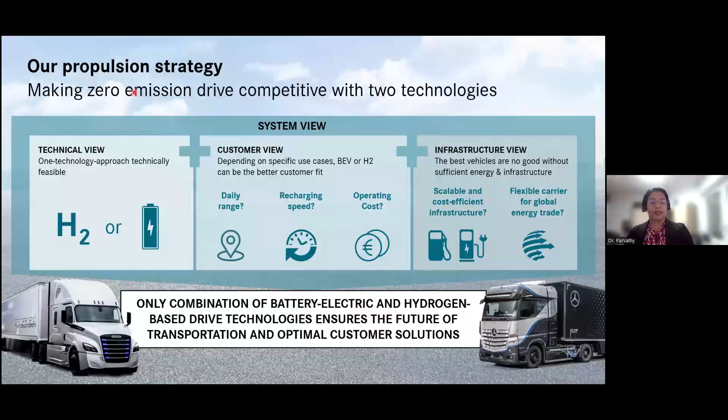A few of the major truck portfolios I'd love to introduce: first is the Gen 2 hydrogen truck, and eActros 600 is our popular model in Europe, with eActros for the smaller version and Canter for smaller payload vehicles. The hydrogen trucks can carry more load over more distance, let's say 1,000 kilometers in one hydrogen refill session.

The battery trucks go for lighter loads, a maximum of around 40 tons, 37 tons, for shorter distance, let's say 500 to 600 kilometers. You can ask questions in between during the slides - please interrupt me if I'm too fast or if you have any doubts or queries.

Our main ambition is, of course, to have carbon neutral transportation by 2039, as per the rules and regulations put forward by countries all over the world.

We have a portfolio from school buses, Thomas Built buses, to Freightliners - these are the European models and buses. The eCitaro is a popular model in Europe and specifically in Germany, and Econic is for waste trucks. Freightliner covers shorter trucks, for example Amazon pickup trucks or DHL postal services. We also offer chargers for developments in Turkey and many European countries, and Fuso is the popular model in Japan.

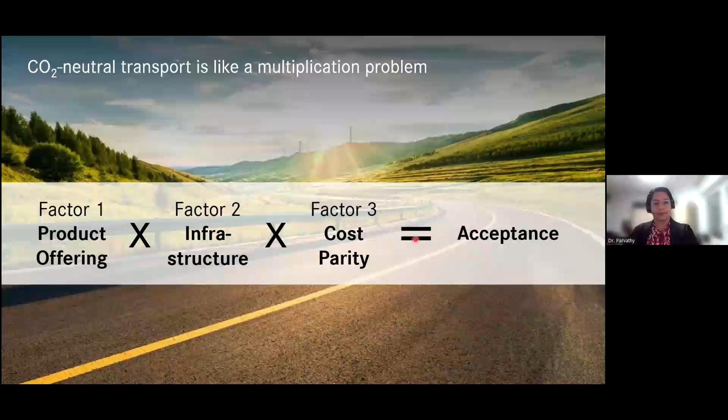So we have strong brands across the world, also in India in terms of school buses and short-term payload trucks. Our software development center is located in Bangalore, near Whitefield, and we have close collaboration with IISc Bangalore and also IIT Hyderabad.

Having given a brief outline about the truck industry, I'd like to give a summary outline of my talk today. First, I will brush up on the basics of lithium-ion batteries, then the safety aspects, how thermal propagation occurs, and also the safety and performance aspect, coming to the final discussion points, which is the second life of batteries and how the applications of AI in transportation are possible.

Batteries are quite important to us. Just think about how many lithium-ion batteries are within 5 feet of you. We are in the online presence, but our laptops, headsets, mobile phones, iPads, everything needs a battery. That means batteries are inevitable for our daily life.

The battery journey started with a prominent innovation from Sony in 1991, in terms of the intercalation battery named lithium cobalt oxide.

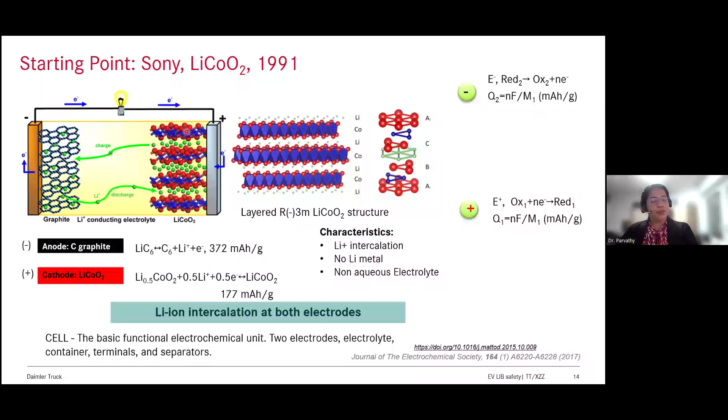This part of it was awarded the Nobel Prize in 2019, for three excellent scientists, Professor Goodenough, and also Akira Yoshino. It's a sandwich structure battery in general. I hope it's clear for all of the audience.

When you have this kind of three-layer structure, it could be arranged in three types of design, called various cell design formats. Depending upon the application, we try to use a specific cell, depending upon the voltage requirement, current requirement, and also the safety. So these are the three important factors.

As you could see, this is a cross-section 3D diagram for an electric truck. Usually the batteries are kept on the ground compartment closer to the axles, with a central line connecting all six wheel drives. It's a 6x2 axle drive, with a powertrain controlling it.

This battery pack, when magnified, looks like various compartments, each made of what we call cells. So cell, module, and pack - these are the three levels of battery.

Let me walk you through the cell formats available. The cylindrical cell - these are the typical cells that we see in our clocks or electronic toys. It's easier to manufacture and quite strong; even if you put it down, it's quite resistant to rupture. But it is heavy because of the metal case, and it's not very nice for multicellular packs.

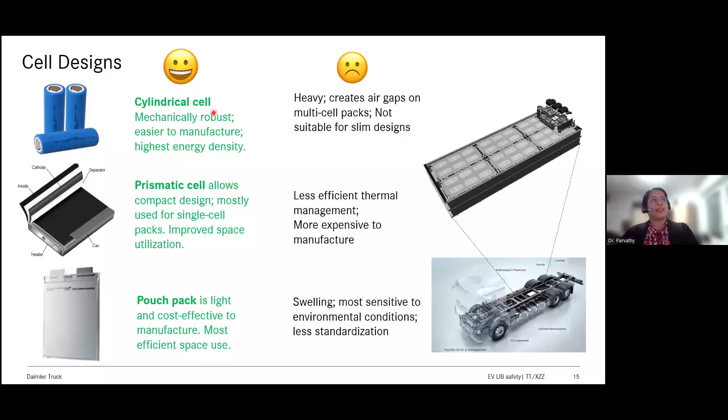So let's visit some of the main battery properties. The first one I would love to explain is that battery properties and the application scenario are defined by various factors. Of course, battery suitability has to be decided based on the type of material chemistry - lithium nickel manganese or cobalt oxide, lithium iron phosphate, or solid state batteries.

So the main battery property that we have to consider is, of course, cost should be less - that is all of our dream. Sustainability - it should have less carbon footprint, and it should be safer because it shouldn't explode, and it should deliver enough power and energy density, and it should last for a longer lifetime.

So all of the batteries, they are like humans. They don't like much higher temperature or higher discharge rates or voltage. So batteries are quite sensitive to the environment in terms of temperature and voltage.

When you talk about batteries, instead of different formats, there are different types of batteries as well for applications. For example, if we have a glucose sensor that needs to be applied to our body, then we need some kind of flexible battery. Here we use lithium polymer battery for that application.

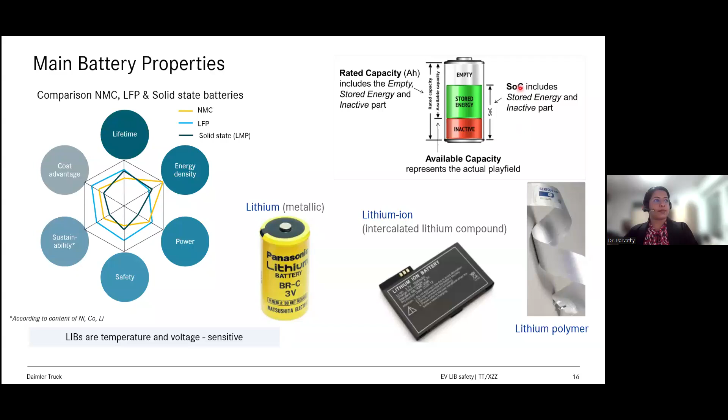As I explained before, there are different battery chemistries, namely NMC, LFP, and lithium polymer batteries, also known as solid state batteries. In these two, we have a liquid type of electrolyte. This is not based on water, but non-aqueous based.

In solid state batteries, the electrolyte will be lithium conductive polymers. That means it's quite solid, but this will provide more safety because it will not flow out during operation or in any safety risk condition. So solid electrolytes are more safe - that means we don't require any more separators, films, or membranes like that.

They provide higher energy density because the anode is usually metallic lithium. The only demerit of solid state batteries is that they require temperature stabilization every time. In order for this solid state electrolyte to activate, we need a temperature between 80 to 100 degrees Celsius, so the battery should always be hot.

There are different companies which produce it for electric buses in Germany - lithium polymer or LMP. These are from France; we import it from France, one of the startup companies, and we utilize it in our electric buses, especially e-Citaros and the freight buses for airports.

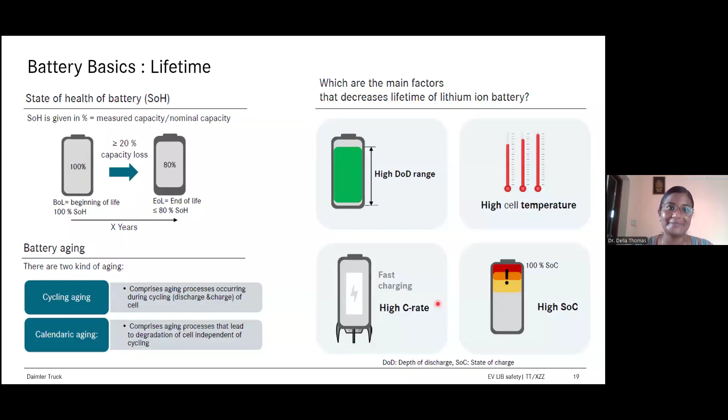I hope this slide is clear for the audience. If there are any questions, please revert back to me. I think they may ask questions towards the end, okay Parvathy? All right, yeah, then sure, towards the end you can give 15 or 20 minutes. Yes, sure, we'll do it like that.

Okay, so we have revisited the battery aspects until now, and not all batteries are the same because we need batteries specific for each of the applications.

For trucks, the main requirement is based on the consumer, because most consumers require more transportation capacity, more payload, and also more range. Typically, truck drivers in Europe, per the rules, are required to take a break after 4.5 hours of continuous driving. That is why we are aiming for more or less 500 kilometers range.

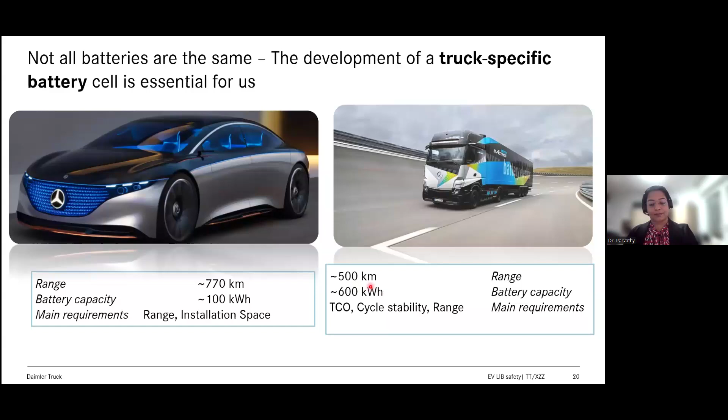When you compare the metrics and numbers for cars and heavy duty vehicles, the car mass is very small, but trucks can go up to many tons. The range we are looking at is 1.2 million kilometers. However, for cars there are different warranty conditions, like 300,000 to 400,000 kilometers maximum for 4 years, because it depends on the individual driver. So we can design the warranty condition as per the customer as well.

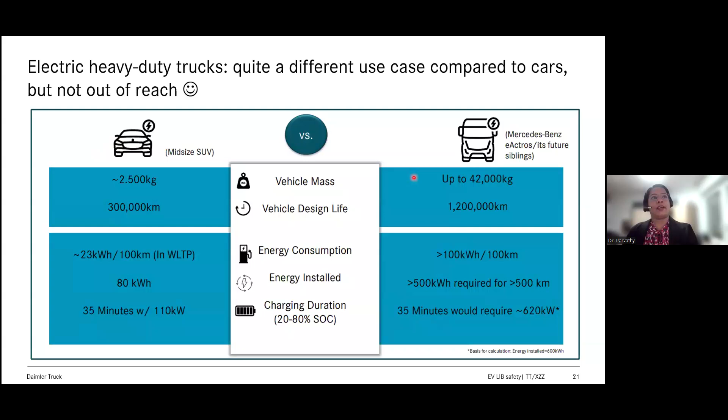The charging duration is very different for cars. Our cars should be charged fast, in the time it takes to get a coffee or so. But for trucks, the payload time requirement is even stricter, because trucks need to cover more distance, so less time should be spent charging. It's a win-win condition, but these are two different aspects of automobiles, heavy duty and medium size.

Of course, when we consider trucks, they are quite big, so the truck batteries are also big, as you can imagine compared to car batteries. The amount of kilometers driven by vehicles ranges from long haul trucks to medium-sized trucks and buses, which are mostly driven within and between cities, like intercity buses and delivery trucks such as DHL and Amazon, which cover shorter distances, and cars even less.

So there are many competitors for us: MAN, Scania, Volvo, DAF. These are mainly the players in the European market, and of course in India the market is different. Anyway, we need to reduce the carbon footprint, and we will provide it because trucks drive more kilometers per year than cars, and this will be more effective.

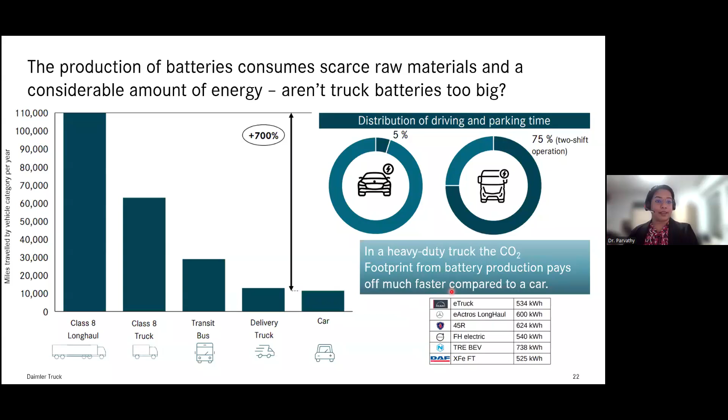So we have revisited earlier the different chemistries for batteries and different formats. Let's have a comparison. All of this is based on the cost the customer can afford, and also how much the C rates and faster charging rates should be. Higher C rates mean we go for NMC-based cathode materials, and for safety we go for LFP. Most Chinese manufacturers are mostly concentrated in LFP-based chemistry, and in Europe it's a mixture of both, mostly.

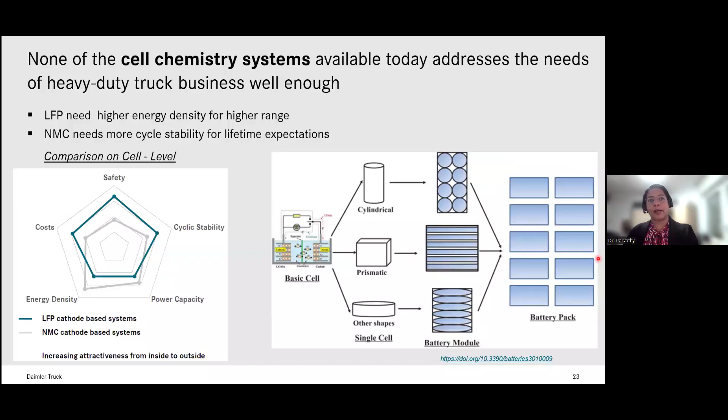As you could see, the cells are the backbone, and we convert and stack them into the battery module, and then stack that completely into a battery pack and enclose it in a plastic case.

So we have learned about the good things about batteries until now. Of course, there are quite a bit of safety concerns with lithium-ion batteries as well. As you can see, some cylindrical battery cells can actually spill electrolyte, which is corrosive, so it's harmful for us, being acidic in nature. Also, some lithium metals could grow and short circuit, causing explosions. This is one explosion which happened in 2021 in southern Germany, because a diesel truck caught fire and 15 of our buses got into an explosion.

This one recently happened in France, and this is swelling of a pouch format cell, which happened in South Korea recently. All of these accidents have an impact on the safety concerns for lithium-ion batteries, which means we need to provide them protection.

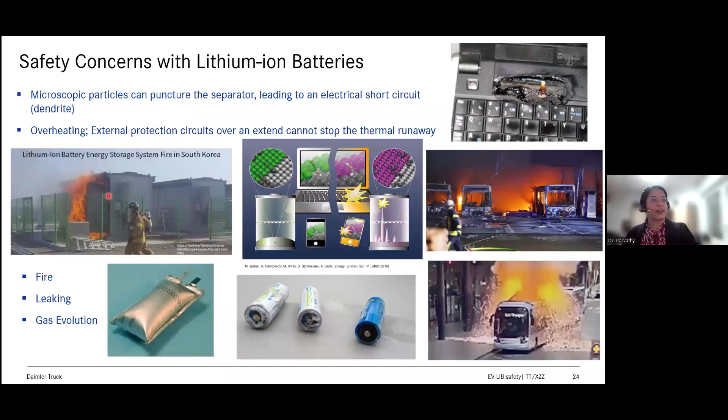In the previous slide, we talked about the accidents that could be caused. So what are the reasons for those accidents to occur? The main causes are electrical, when we overcharge or over discharge; thermal, if temperature fluctuations are too high during use; or mechanical abuse.

If somebody tries to penetrate the battery or sometimes drop the battery, internally, unfortunately, this could not be avoided, some short circuit mechanisms. Of course, there are many testing activities which could replicate this kind of phenomena, and this is what all the automobile manufacturers use.

So they try to do all the mechanical, electric, and thermal abuse tests, and thereby studying the safety aspects of battery. Always operate the battery in a safe, normal area that is specified by the manufacturers. And over the voltage range, single cells means 2.5 to 4.2, depending upon the temperature range that you are supposed to operate.

Once it reaches the damage area, the composition of the material changes and structural changes happen, and there will be an exothermic chemical reaction. This detail we will deal with in the next slide.

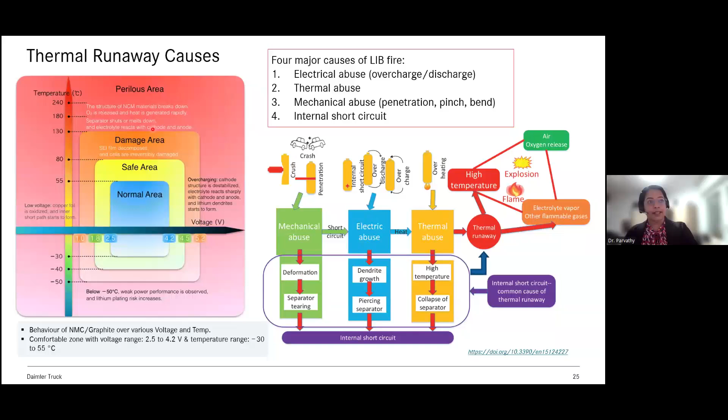So when there is a temperature fluctuation, it is like a cyclic chemical reaction. Suppose this one cell is having voltage, current, or thermal fluctuation, thereby it will cause an effective temperature rise and the chemical composition will change at the atomic level, and there will be an exothermic reaction, meaning heat is generated. The heat will be dissipated at some point, but then again heat is generated. And there will be some software warnings for it, an early warning.

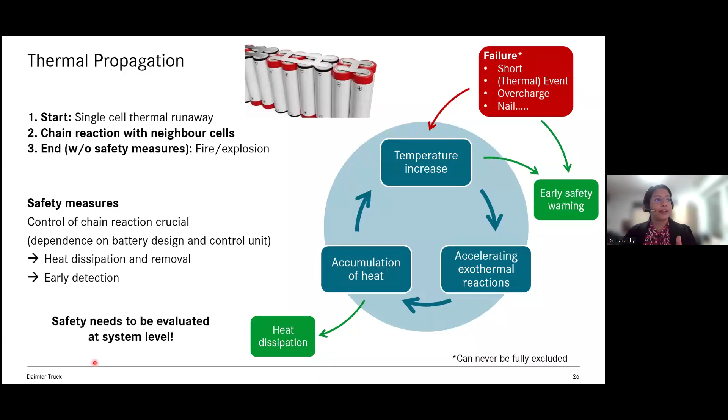If there is only one cell, we could somehow contain it by turning off or using the safety mechanism. But if multiple cells are affected, unfortunately it's like a chain reaction, and this will continue no matter what safety mechanism is in place. So we need different levels of safety mechanisms in the cell, module, pack, and system level. System level means vehicle level.

We have seen the various cell formats previously, such as cylindrical, pouch cell, and prismatic cells. There are various tabs on top of these, and also heat dissipation mechanisms and current interruption devices for the various cell formats.

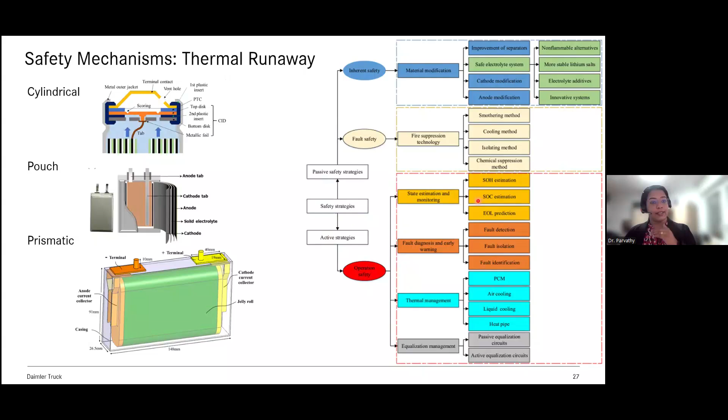There are many safety strategies, active and passive. Passively means we can use a resisting component to dissipate the heat. Sometimes manufacturers use a brake resistor to dissipate some of the energy. Active strategies mean we always use thermal management software, battery diagnostic software, and monitoring software. This gives more efficient warning and early state estimation to the user, whoever is driving the vehicle.

All of these concerns should be addressed, and we need more research and development activities, especially regarding aging and degradation mechanisms. We also need new battery materials and innovative methods, and we require understanding of how batteries behave thermally during the chemical reaction. So lithium battery safety could be engineered through better, more efficient materials, better battery materials, and better software. And the brain of the battery is the battery management system, which we will revisit in upcoming slides. In general, these are the battery safety risk hazards.

When you say batteries are important for each and every application, there are many test and development activities behind it. We need to identify which is the better battery for our application. I am coming from an automobile field, so that means individual cells need to be evaluated for electrical suitability, temperature stability, and abuse tests, also known as negative tests. These are operating above the normal window to find the safety aspect.

All the individual battery cells will be stacked together to form a module, and modules are stacked together to form battery packs. There is an individual battery management system, in short BMS, which controls the range, the operating window, and also the early warning signs for the user. For trucks or electric vehicles, we require multiple battery packs stacked together because the energy requirement is quite higher.

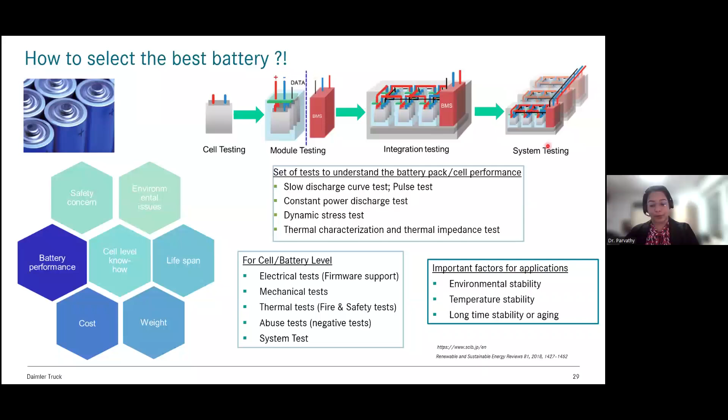Safety could begin from the material level, which is the chemical level, evaluating the flammability and toxicity of the chemicals, and determining the best anode and cathode materials. At the cell level, we could see this example of a cylindrical cell, with some kind of tabs on top to provide cell-level safety.

But module and pack level means all of these cells are stacked together, so if one of them goes into thermal runaway, there are chances that the fire can spread to another compartment. This should be avoided, and this is the most critical aspect for the entire automobile industry. For electrification, we need safety design.

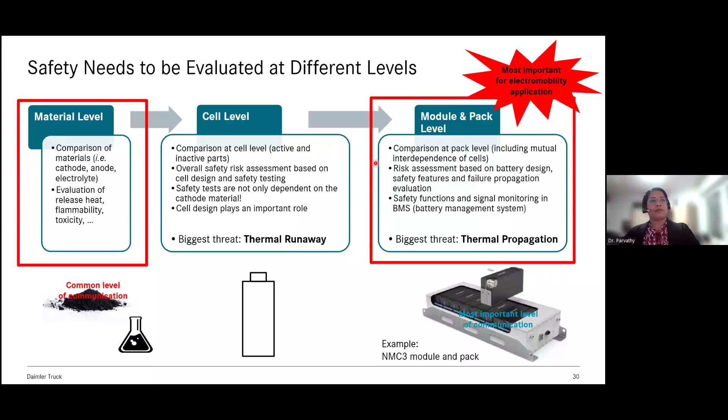So as a first part wrap up, I would love to give you a conclusion. We have studied the basics of the battery. We have revisited what are the safety hazards and how we could select the best battery material depending upon our application, and also how to improve the safety of the batteries.

These are the chemical phenomena which happen when the battery is subjected to high temperature, and there is heat accumulation and then explosion. These are the chemical reactions at the different stages when they undergo thermal runaway. And we have revisited the terms of the battery, namely different battery definitions.

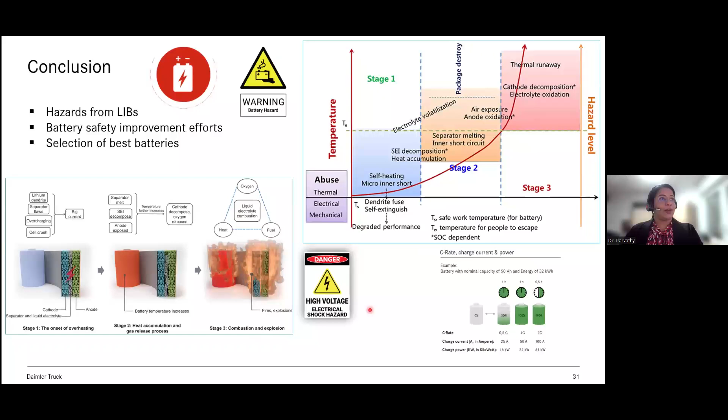All right, so next let's go back to the environmental impact of the battery. We have different types of battery manufacturing techniques, such as based on chemicals, water-based, and without the need of any solvents. There's also the dry coating method. Tesla batteries mainly are made using dry coating methods, and we need all of these steps.

We need expert input and also quality control, because the materials have to be shipped from all over the world. As you know, battery materials are shipped mainly from China, from Australia for lithium, from Chile. So we need logistics control, and best quality control shall be processed.

We also need the data for our critical parameters, because the battery has to be operated at certain safety conditions, and all of this requires data. This is where we require artificial intelligence and machine learning algorithms. So even in logistics, warehouse, and production, we have to use all the data analytics.

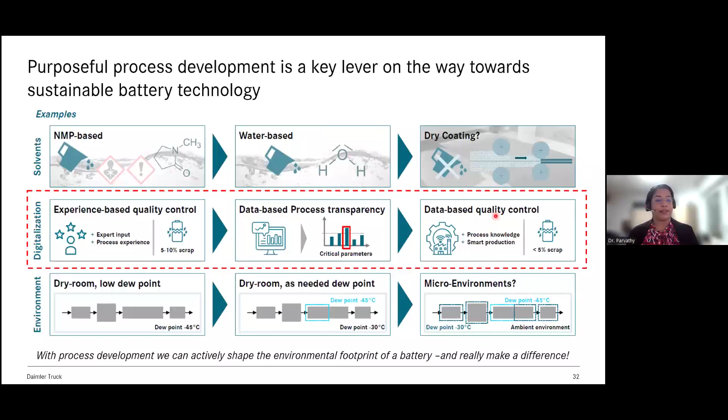For any production unit, instead of producing hundreds and millions as investments, we first need to analyze how the production unit will come in terms of twinning it. So we make a digital twin of any battery based on the modeling aspects, the lab data which we previously tested, and we also have the field data from the vehicles currently on the road.

Based on machine learning and algorithms, we try to predict what might be the effect for 10 years, 20 years, and how much lifetime we could use this battery safely, and in case when this battery should be shut down from the roads due to safety aspects.

The system design, the complete vehicle design, has an impact on this whole service life and also the overall performance of the battery. So these are the main factors which provide us information about the battery lifetime.

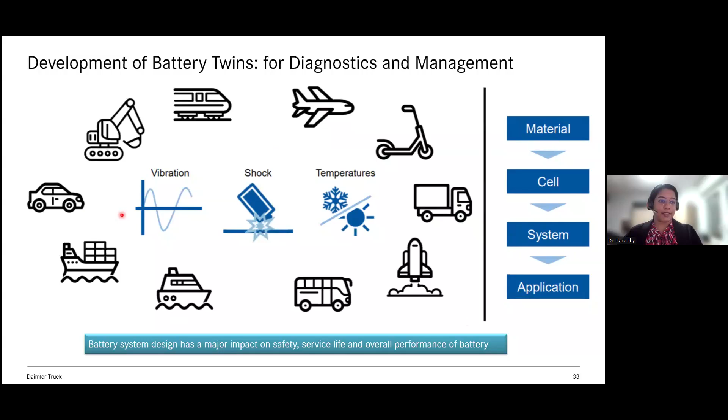So we have revisited the basics of the battery and how it is important. The batteries could come from different chemical materials, the chemical components, to the cells and pack, and then to the application—whether it is for the airplane, or for small e-scooters, or for long haul trucks. We need all the safety aspects, and we need data analytics as a backbone for it.

Talking about safety, we have previously visited that batteries have to be operated at certain conditions, so that needs software control. The battery management system is the master brain of the battery. As you could see here, there's an example of the battery which is serially connected.

There are different types of batteries, and this will be monitored for the current state—how much is the charge? For example, 100% charge, 50% charge. So sometimes this battery, as an example, will be at 80%, however this battery will be at 90%. So we need to equalize each of the batteries.

And this is called cell balancing techniques. In addition, we need to have protection mechanisms, thereby sensing what are the overcurrents or short circuit currents, and this will be controlled by microcontroller or microprocessor based systems.

This provides outside information to the user and to the dashboard on whether the battery is overcharged, over discharged, if there's any error, and to the pack level communication as well. So we need safety aspects from the battery management system or BMS in general, and also the performance.

The performance window, its operating window, should not be violated. We also need to monitor the aging in terms of the state of health. That is done by diagnostic software, which is also included in the BMS. So BMS monitoring is very important in every aspect.

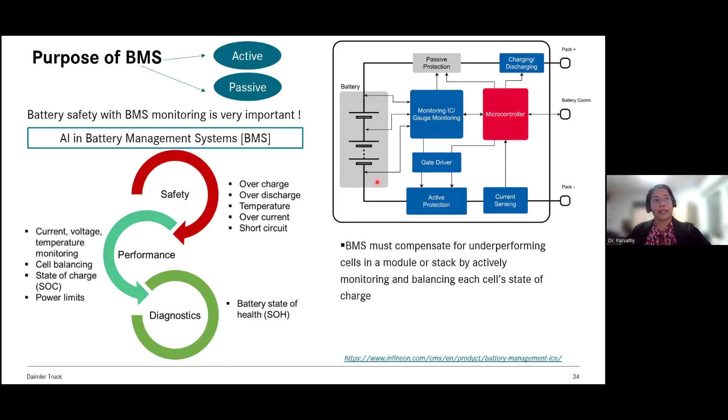And of course, when we are charging the batteries, we will actively monitor and balance each of the state of charge and make it uniform so that the battery can perform in an optimal range.

All right, so in a circular economy, the battery, once it is produced, can be used first in electric vehicles. Artificial intelligence is a backbone for controlling how the battery works.

And also when power is delivered from solar, wind, or any of this charging, we need the power quality to be uniform for all of the users. So that means AI comes in to help for it.

This also helps in understanding the aging of the battery, what are the optimal driving conditions, and how to reduce the footprint of the battery in general during its operation.

So whenever we make a battery, it's not only that we make a component just to dump. That means we also need the batteries to be repurposed for a second life.

Repurposing means once the battery has reached, let's say, end of life, approximately 80% of the state of health, it will be taken out and can be used for some other application like energy storage.

And some of the cells could be used for non-critical applications in home appliances. So this is called refurbishing.

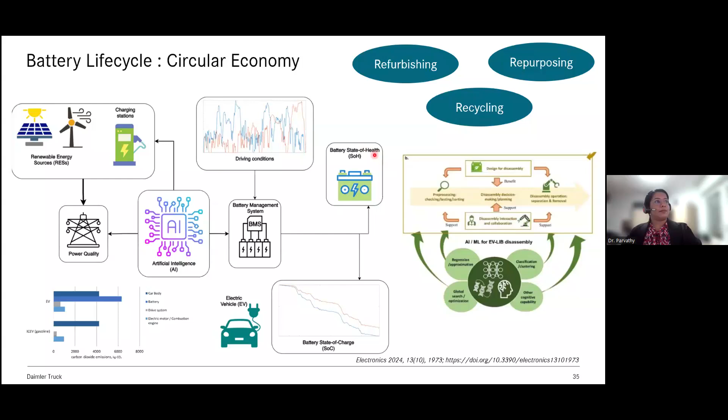And then we use it in the first life, which is our vehicles. For my case, it's trucks or passenger cars. And then after it reaches a certain amount of time, it can be used for second life applications.

Once it reaches the retirement time, which is 80% of the state of health, then it can be remanufactured, or in short, reman. It can be stored for use in energy storage applications, or it can be recycled.

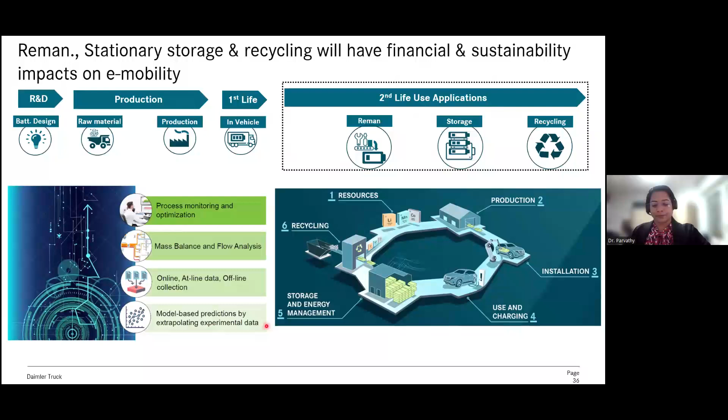So what do you mean by second life for the batteries? As you can imagine, the battery is a very large contributor for the commercial sector in any industry. So there are a lot of electric vehicles produced over time.

And these batteries, once they reach, let's say 5 years or 10 years, can no longer be used in this kind of vehicle because of safety. So once it reaches 80%, this is end of life for use in a car or any electric vehicle.

So the second life would be taking the batteries and using them to store energy, as an example, from solar systems. When solar systems are operated, we need a battery to store the energy.

When wind turbines are operated, we need a battery to store the energy. So this second life of electric car batteries could be in the energy storage system, or in general, battery energy storage systems.

And in the end of life, this also has some end of life conditions. Of course, when the battery is no longer safe, once it reaches approximately 30% or 40% state of health, then the battery could be recycled, collecting again the constituent materials.

So all of these vehicles will be reaching end of life sooner or later, in a couple of years. So we will be dealing with second life batteries soon as an important topic.

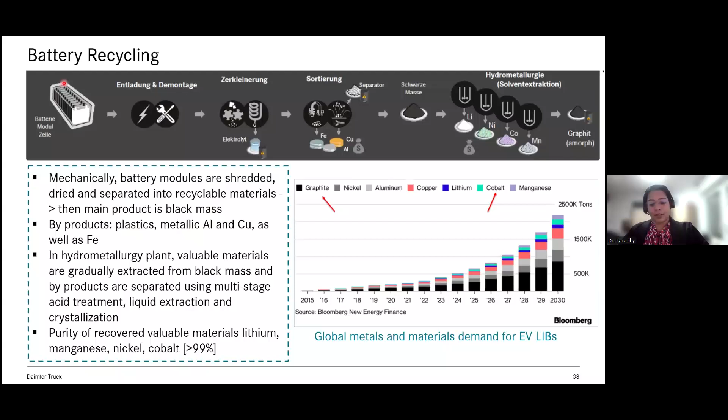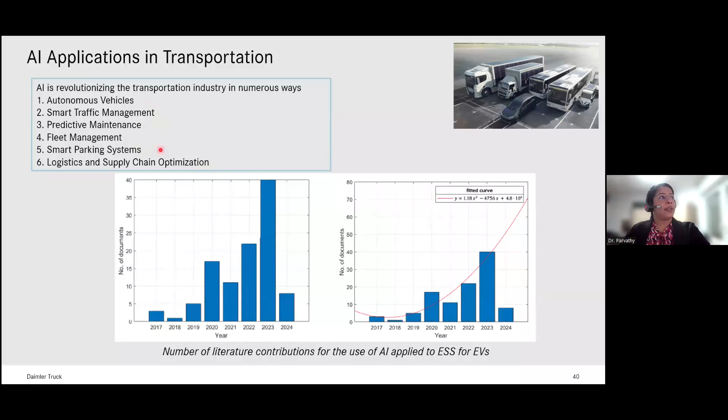The data can be used for predictive maintenance of vehicles, and service warranty and guarantee conditions, and how effectively we could use public transportation for fleet management and smart traffic management. In the next slides we will revisit all of these aspects.

Every day, the battery generates gigabytes of data, whether from the battery health state, the vehicle state, or the surrounding environment. We have a lot of data from electric vehicles, so if we exploit it nicely, we can predict the future maintenance of that electric vehicle.

When there is a lot of energy coming from grid activities, the power quality could be detected, and this could be very effective for sharing the amount of charge to different applications, namely charging stations, stationary storage systems, power plants, or even industries.

AI methods could control electric power systems, even for generation and optimization of wind and solar power. Due to the nonlinear behavior, power quality could also be difficult because of harmonic distortions, so AI could give a very good idea and optimize the power quality.

Comparing to vehicle-to-grid applications, when power plants are producing, or even when our in-house solar plants are producing a lot of energy or electricity, we can give that back to the grid, and this can also be applied by means of AI.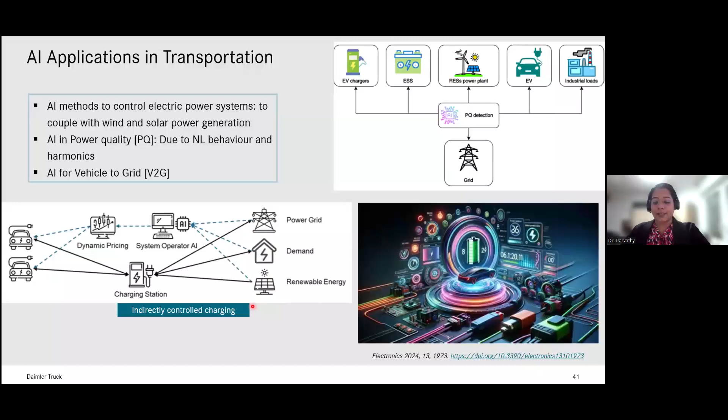The important application of AI in the automobile field is the autonomous driving assistance system, or ADAS. We have a close collaboration with the startup company named Torc, who provide us with autonomous driving packages, meaning we have to make autonomous driving decisions during vehicle operation.

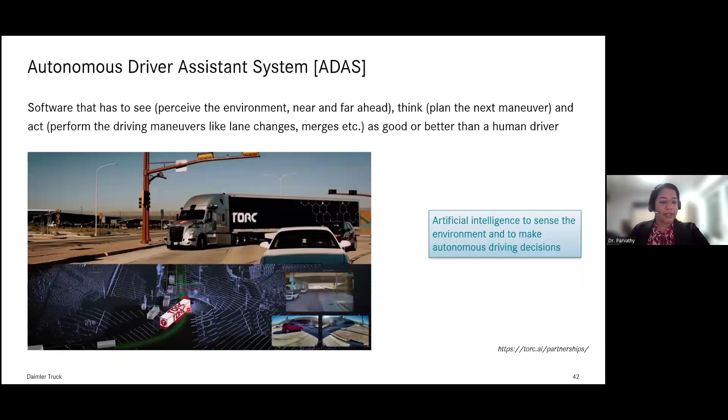As a typical example, if we consider this image as a primary one, as classified output, the images will be rendered into pixel maps, and we will understand how many vehicles are lying ahead of it, what are the obstructions, what are the pavements. So all of it requires that everything has to be labeled accordingly. No object should be mislabeled or misjudged, thereby reducing the effect of autonomous driving. So we need a lot of quality control processes and also the labeling even in the parking spaces.

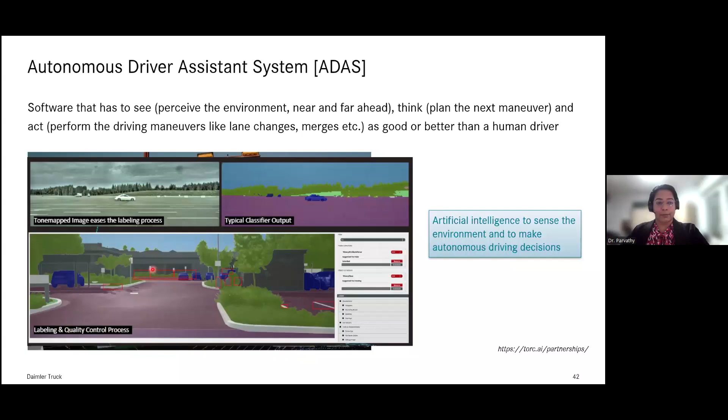Coming to autonomous parking, or automatic car parking systems, Bosch has an automatic car parking system which is widely established. What they use is short-range radars in the back, and these labels will be designated, and they have automatic steering mechanisms to drop off the vehicle for very easy usage.

When we talk about automation, there are different levels, ranging from 0 to 5, which is the fully automated one—still a dream for everyone. The first is manual control, with no automation activities. The second will have some cruise control mechanism; automatic cruise control in many vehicles today is level 1.

Level 2 is partial automation, an automatic driver assistance system. This also has control over the steering wheel and provides smart parking and other aspects, but it's partial, and human override is possible at any time.

Levels 3 and 4 are the aim of the current automobile industry. Level 3 is based on conditional automation, meaning the environment is detected—objects that are moving—and most of the driving could be performed on a highway with clear markings. Street signs could also be detected, by lidars, and radar will help avoid collisions.

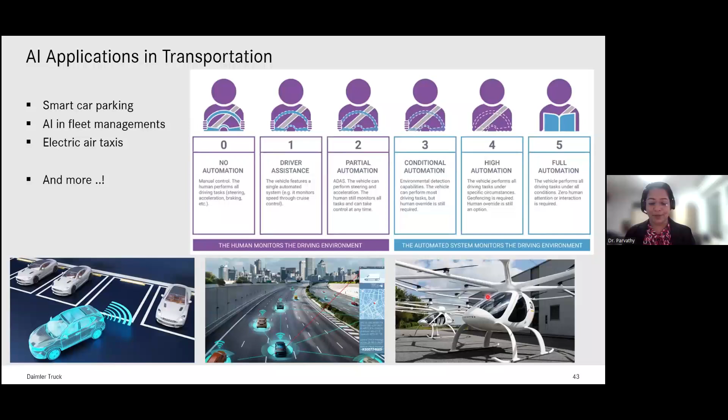As a wrap up, our future is electric. We need to revolutionize, reduce the carbon footprint and the fuel burned per car. We need to optimize car CO2 emissions and fossil fuel consumption, and we need more grid activities and more charging stations for electric vehicles.

Assuming the carbon footprint is kept minimum—because for electric cars, the batteries generate a large amount of carbon footprint during production, but during the running process we are not emitting much carbon dioxide—so the overall footprint is still kept at minimum.

When we compare different industries, the coal industry is a main factor producing carbon dioxide. Transportation is still giving more innovations and reducing the carbon footprint. Industry is also a main aspect, and residential usage also produces carbon, but these two are factors which are in control—industry emissions are inevitable, but let's see how the world progresses. EV market sales are increasing every year, and I hope it will increase in the coming future as well.

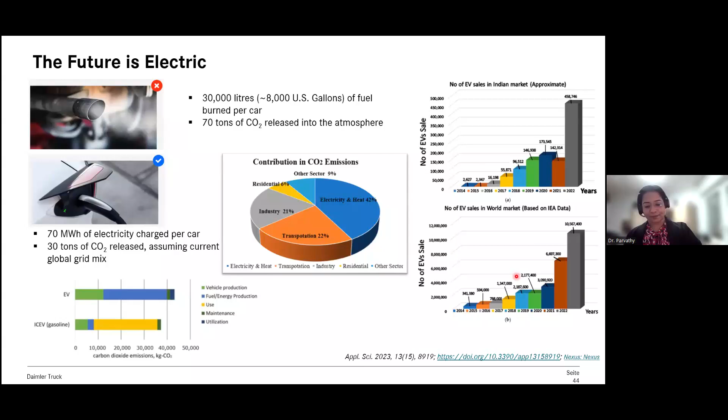Ma'am, can you hear me? Yes, I can hear you, please.

You told that at 80% state of health, the battery enters the second life. At what percent of SOH does it enter the third life? That is end of life criteria, so the state of health will be about 30% when you reach end of life. The first retirement from the automobile aspect, from the road, is at 80%.

And when you have to start recycling, it will be state of health 30%. Thank you, ma'am. My other question is how is V2G performing in Germany? Is it allowed over there? Vehicle to grid system, is it allowed in Germany? Yes, it is allowed in Germany.

The government provides more solar system subsidies. So if we have excess energy, we could give it back to the grid, and we could also provide it to the charging stations.

Can we give it to the load points, V2L? That is still under discussion because the power quality fleets are not yet optimized so much for it. The government is still not allowing that, but in the residential phase, we could give back to the grid, but to the load point directly, not yet.

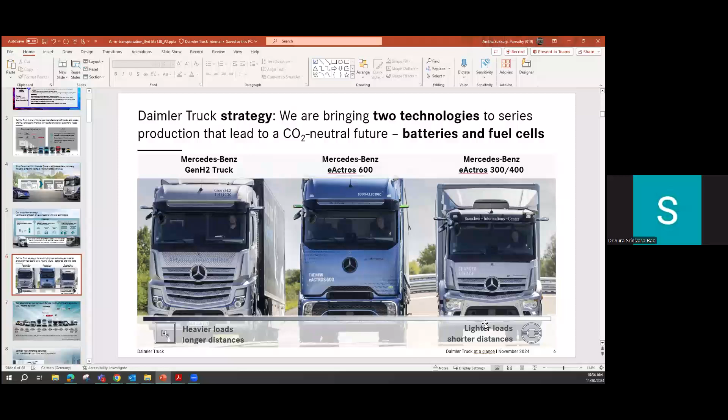Suppose everyone is shifting towards electric vehicles, say 70% of people, then who will take care of the load, because the power system is designed for the existing system. Based on load forecasting, as electric vehicles increase, that will affect the load, so the existing power system may or may not carry that load, with power quality issues. Is there any mechanism for that, like load balancing or power quality issues?

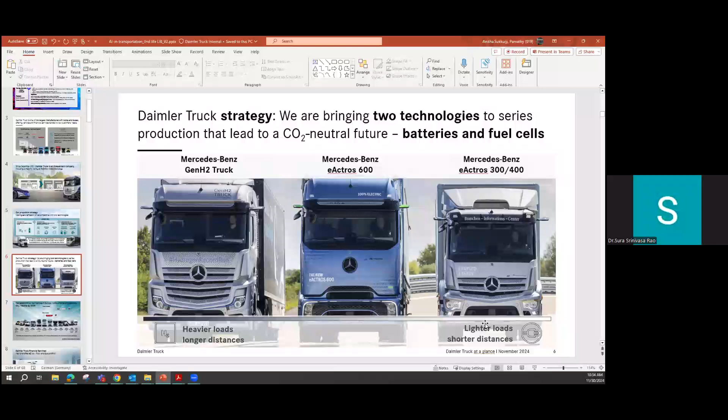Like non-linear behaviors, harmonics. Yes, of course there are. When we have a surplus of energy from our residential systems, we could give back to the grid, so the grid has to balance, and we require a lot of analytics in that part.

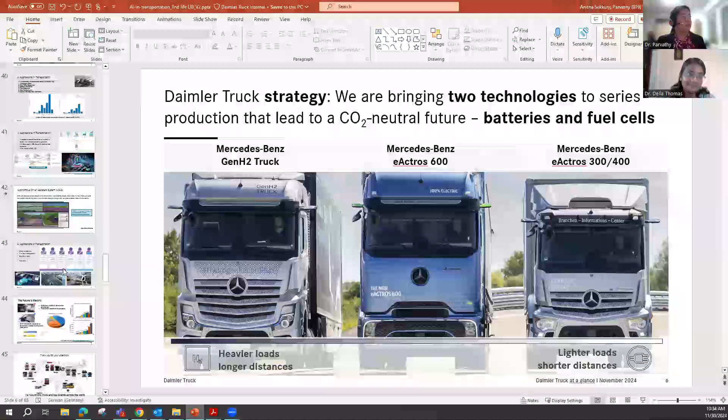Which I touched upon in the last session. Let me go back to the slide, previous slide, give me a moment please. So here, yes, for power quality we have a lot of load detecting mechanisms. Do you have any specific questions how it is being compared, or how the mechanism works in general? My question is load balancing will cause power quality issues also. Yes, how will we work on that?

We need more energy. If electric vehicles are more, of course we need more energy sources, meaning we need more renewable sources that give us more green electricity. However, there's a limitation of the power generated from renewable energy sources. Solar energy is good in Asian conditions, India especially, but in Germany solar energy is not very much there, so we have a scarcity of it. We don't have much waterfalls, so hydroelectricity is also not an option.

So renewable based energy charging stations are not much of an option. We are mostly removing the nuclear power plants, so we are borrowing in terms of Germany's electric condition. Most of the power comes from outside Germany as well. There's not a lot of waterfalls for hydroelectric power generation, the second is nuclear power plants, and third, coal-based manufacturers are still there. So the footprint is quite higher even in terms of energy.

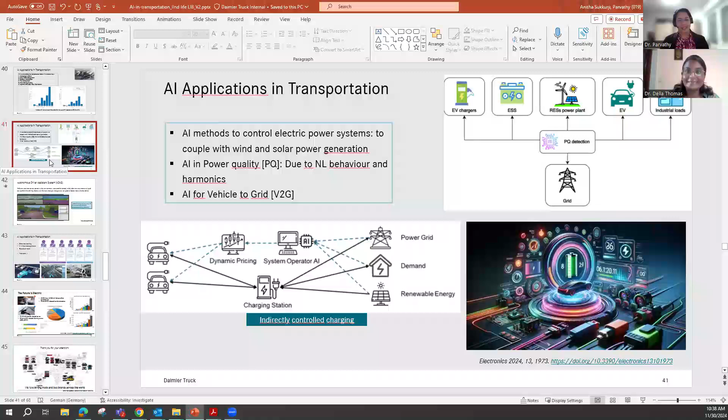Ma'am, in India most electric manufacturers offer 8 years warranty for the battery. Does it mean that for these 8 years, the state of health will reach 80%? The battery warranty model depends on the user conditions also, and the kilometers driven by the user. They usually provide 8 years of warranty for certain kilometers, for example maybe 300,000 kilometers for 5 years, something like that. So this will be the warranty condition.

In every warranty condition, you will have a kilometer term, and that comes from the driving profile of that user or the previous user, data we have from the market, such as how much acceleration is applied, from previous data analytics of users. This will be a forecast of the warranty condition. So does it not have any relation with the state of health?

It does have a relation with the state of health, yes. As per the regulations, once the battery reaches 80% state of health, we have to take out that battery from the automobile and replenish it with a new battery.

So if that happens within the warranty condition, of course, the manufacturer of that vehicle should provide a new set of batteries to keep up with the warranty condition. But 80% state of health should not be violated at any cost, because that is quite dangerous for dynamic driving in road conditions.

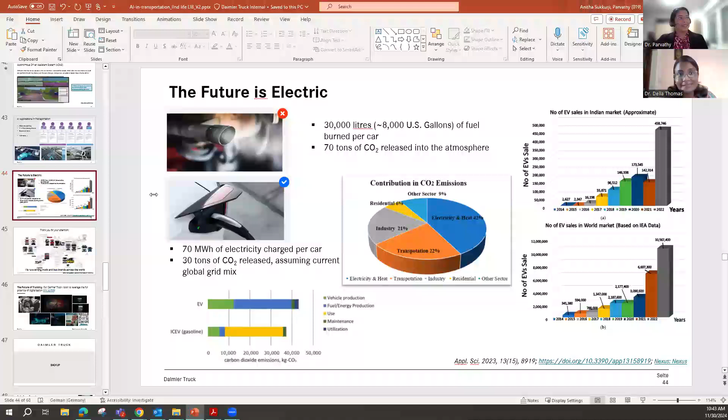Right, thanks for the question. So for advanced materials, of course we need more research and development activities. Since I'm coming from academia and later to industry, I should say academia has a lot of activities which will be ready maybe in a couple of years with a graduate student or PhD student's research. But to reach industry, it will take longer, at least 5 to 10 years, because we need a lot of safety aspects, and also how affordable the battery is in production, the cost, how safe it is, and how much materials can be purchased globally for that. So it requires more time.

What are the advanced materials right now? Based on silicon and LMFP. LMFP is a derivative of LFP, lithium iron phosphate - instead of iron, there is manganese. So these are more advancements coming out. And of course, there is more research activity on solid state in the US and all over the world. There are joint ventures by Volkswagen with QuantumScape, a solid-state battery company, ramping up solid-state batteries for their ID3 vehicles, for small electric vehicles like the size of a Polo or Volkswagen Golf. And there are silicon materials which could be used along with graphite, because silicon gives more energy density.

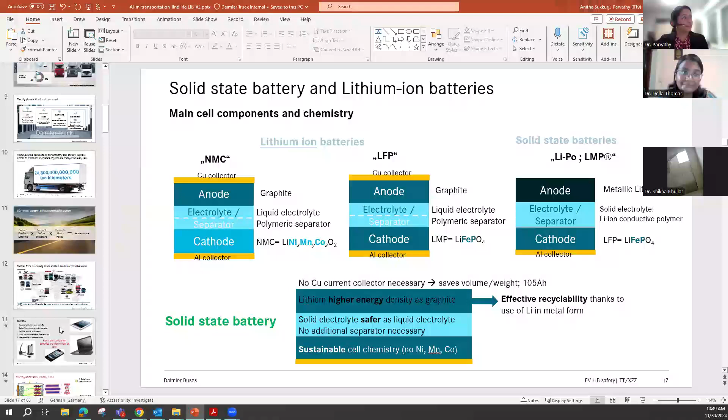Let me check the battery slide, give me a moment please. All right, so for hybrid vehicles - this is a complete EQS, that's a complete fully powered battery electric vehicle. For the plug-in hybrid, or in general hybrid vehicles, there are two technologies: petrol and diesel.

So you can fill up the petrol tank. As an example from my own car, I can tell you - we can fill up to 560 kilometers for the petrol and about 82 kilometers for the battery, with full charge. So the propulsion mechanism is that when the battery is fully depleted, only then it will switch to the injection, the combustion engine mechanism.

Similarly, there are also diesel hybrid vehicles for trucks. For trucks, diesel hybrid vehicles exist mostly in the European market - I don't know about the Indian market. Because we need a lot of diesel for it, and efficiently, petrol has much higher charge than diesel. So diesel hybrid vehicle is a solution, and we have a good market in Europe and also in the US. That means diesel will be used in case the battery runs out. I hope this answers your question, Dr. Ravinder.

Yeah, thank you very much for that. I do understand, but I'm looking really - will there be any innovation if the battery really drains out? How to manage myself to drive the car? That's the big question.

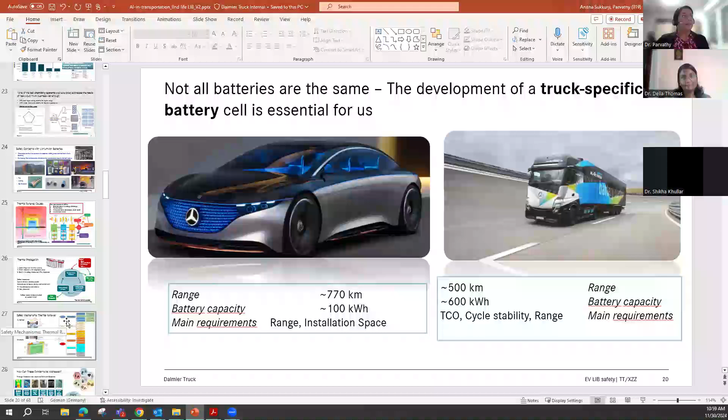One question regarding recycling of lithium ion cells - how profitable is this business? In India it's in a very nascent stage, so industries are looking into setting up recycling plants. Is it because until there's profit, corporates aren't coming up to set up plants?

In India, the EV market is only 2 to 3%, and the government wants to increase it to 30% by 2035 or 2040 with FAME policies, FAME 4. After that, maybe in 5 years, there will be a challenge for manufacturers and customers on what to do with these batteries. Until then, it's an uncertain situation. Profitability of material extraction isn't there yet because the energy required to dismantle and extract battery materials isn't giving a profitable return on investment. This is happening at a smaller scale in Germany, but there aren't large scale recycling plants yet. Volkswagen and BMW do some refurbishing, but not much recycling. Mercedes also has a small sister brand for recycling, but it's not yet profitable based on the metrics I've seen.

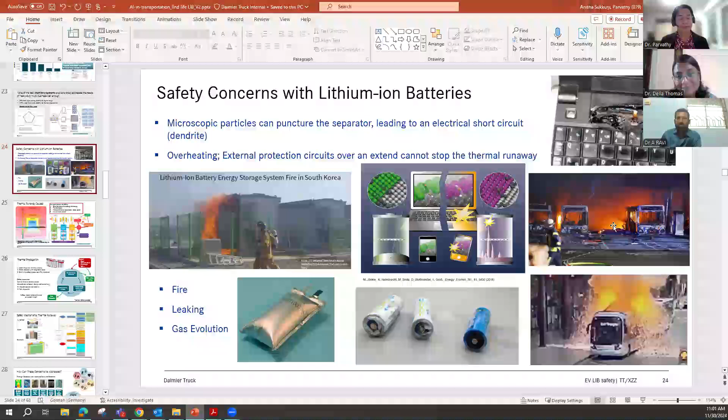I think participants can surely contact, or if the next speaker has not joined, participants can ask one or two questions. I have joined, by the way. Sorry, sir, I didn't see you.